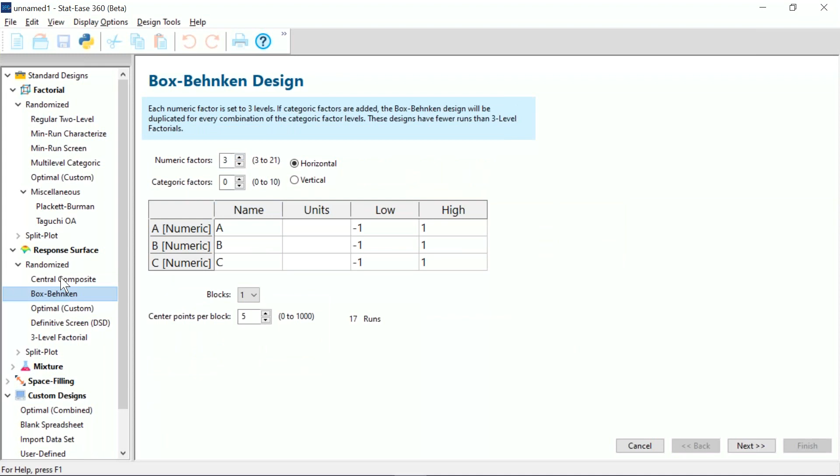Now, if you get the software, you can get it on trial, and you can learn about these 2-level designs by running these tutorials as a do-it-yourself, run all the way through that. And then if you're interested in response surface, there's a tutorial on that.

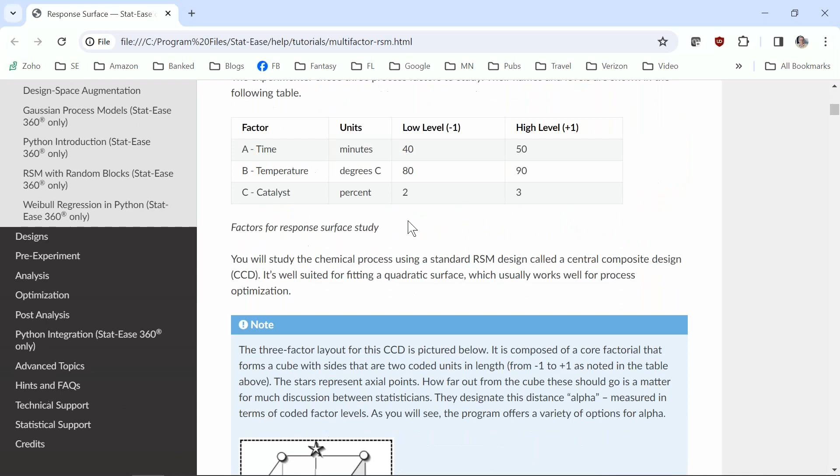And in that tutorial, it shows a picture of the central composite, which is the core of the 2-level factorial with the center points, and then with these axial points represented by stars sticking out of the sides to give you more levels and more leverage. Okay, so that's the basic strategy of experimentation.

And oftentimes we refer to this as SCO, which is what DuPont called it when they started promoting this back in the 1950s. They called it the SCO strategy. And then I added the R to make a nice acronym of SCOR with the ruggedness testing. And this final phase, which is really confirmation, you could run more advanced response surface methods even at this point to generate the quality by design space. But the quickest way of doing it would be the ruggedness test.

Okay, so now I'm going to go back to my control panel, and I'm just going to ask if you're with me so far. Raise that hand button. All right, Wolfgang, thank you for weighing in. Gabrielle, and so forth. Okay, great. So I'm going to put the hands back down.

Also, we know from looking at our design builder in Design Expert or Stat-Ease 360 that if we go to the 7 and 8, that's a red design, that's going to be very low resolution. And so we'll end up confusing main effects with multiple 2-factor interactions, which is not a very good idea. So let's say that we reject that immediately because of the poor resolution. It's also got low power and we're missing 2 factors.

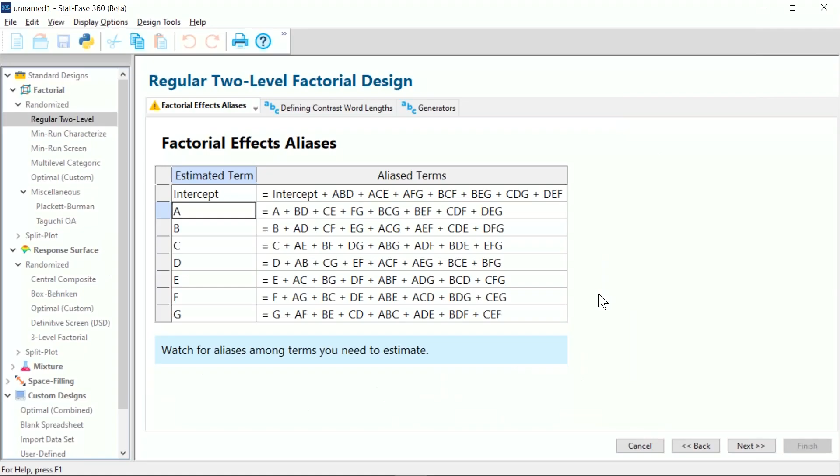So then we consider looking at all 9 factors in a classic 32-run design, classic or standard. So now let's say we go to the 9 factors, we're going to have to go to 32, but now that's too many runs and we're kind of overpowering things. So nope, let's reject that one.

So then we decide that we're going to choose a modern minimum run screening design. These are optimal designs, but they've been formatted and templated, so you're always going to get the same pattern. And then if we add in 2 extra runs, that'll be good. And so I'll show you where that is. That is under minimum run screen.

And the absolute minimum for 9 factors would actually be 9 times 2, which would be 18. But we warn that if you do that and you have 1 missing run, it's going to degrade back to the low resolution or red design.

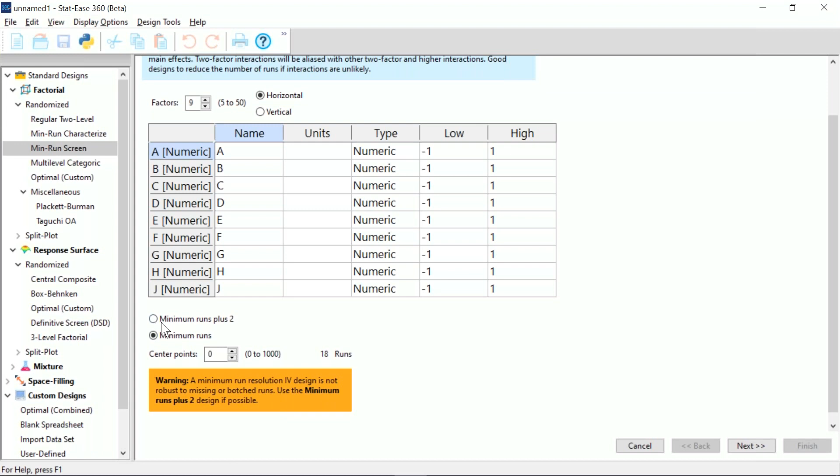So we rebuilt this, and I give credit to Pat Whitcomb, the founding principal of Stat-Ease, and my colleague going back to the 70s, and Professor Gary Oehlert at University of Minnesota as our advisor developed these, and they crunched through all of it twice after doing all the crunching, which took about a year back in the day with the slow computers, and getting the minimum run part of it. Pat woke up one morning after a sleepless night and said, hey, we've got to redo this all with 2 more, and this is what we recommend.

Now, we only have 20 runs here instead of 32. So if you're with me on this, that maybe this might be the way to go with the 20 runs, press that raise hand button. And I just want to see if you're buying into this idea of kind of, like Goldilocks, getting just the right size. Okay, I'm getting some positivity coming back, so I appreciate that.

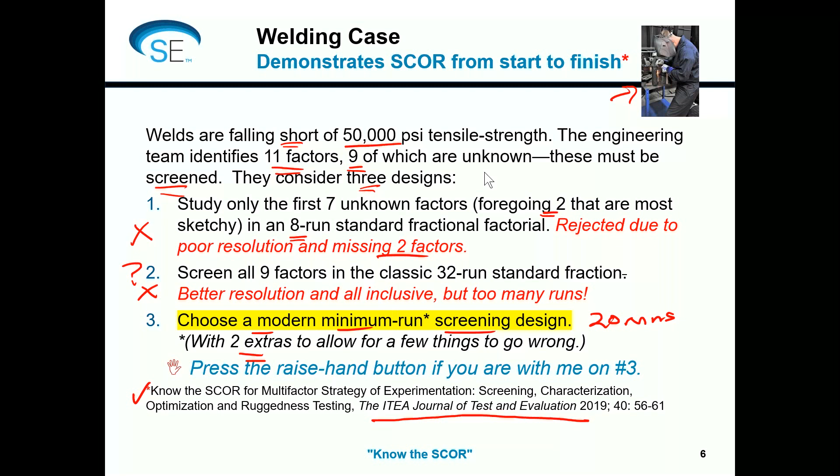And then I have a slide that just shows where we're at with 9 factors, cutting down to the absolute minimum, but then plus the 2 would equal 20. And that's what I would recommend. And you can see that this is going to be very advantageous to use these minimum run options for screening. And then we also have them for characterization as well.

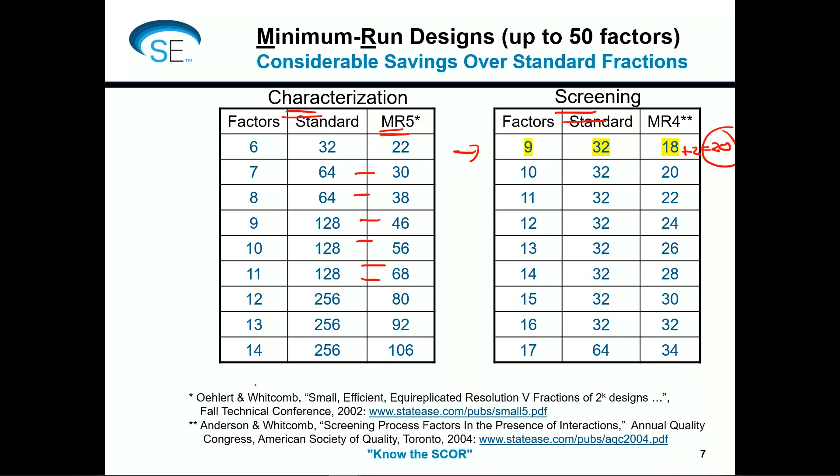And so you can see that with these characterization designs, we can achieve a minimum run with a resolution 5, which will detect 2-factor interactions, but we can reduce the number of runs substantially. So here you see Pat and Gary having published their paper, which is available on our website. And then I gave a presentation to the American Society for Quality back in the day, talking about these designs.

Okay, so now let's look at the welding case in detail, and let's look at these 9 factors. Now remember, there are some other factors that are being set aside at the moment, according to our strategy. And you can see that they've got a whole series of different things that can be changed from low to high to see if they have an impact. One of the factors is categoric.

And then another funny little thing here is that the letter I is missing. We skip right from H to J because I is being used for the intercept, or in the technical jargon of design of experiments, it's the identity column. But either way, we're skipping past I to avoid reusing the same letter for 2 different things.

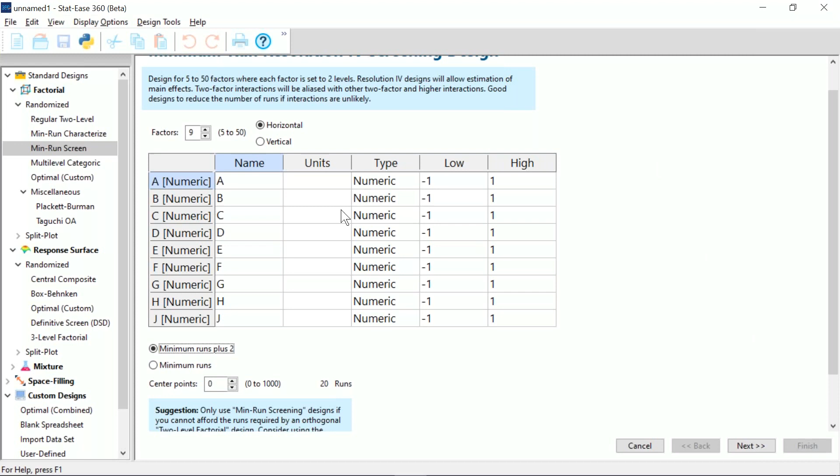Okay, now what I've got here is just some of the 20 runs shown here, and I've skipped by a bunch of them. But if you look at the tensile strength results here, you're going to see that we have some that are exceeding the goal of 50,000, and so that's going to be a promising outcome. Now I'm going to go ahead and go to the tool, which is Stat-Ease 360, but it includes all of Design-Expert. And I'm going to open up this screening design.

And then I'm going to do Control mouse wheel to reduce the size of this. It's going to be pretty small. But what we're going to see if we sort this is that there are some runs that are above 50,000. Let me Control mouse wheel this up again and then just scroll over to the right. And so we can see sorted out that there are some runs above 50,000. So that's good.

Okay. Now, just to show you how this is built, we're going to be going with minimum run screen, and just typing in the names, the units of measure, the type, and remember this last one is categoric, not numeric. So we have alphanumeric information typed in here, and then you can see that we're using the +2 option.

And it turns out with the aliasing of this that the main effects are aliased only with 3-factor interactions. Oh, I'm sorry, this is a screening design, so, like I said, the main effects are aliased with only 3-factor, which means that they're fairly clear because we could ignore the 3-factor interactions. But the 2-factor interactions are still aliased with other 2-factor interactions. So this is really only going to be good for looking at main effects. If any interactions come out, they're going to be kind of messed up.

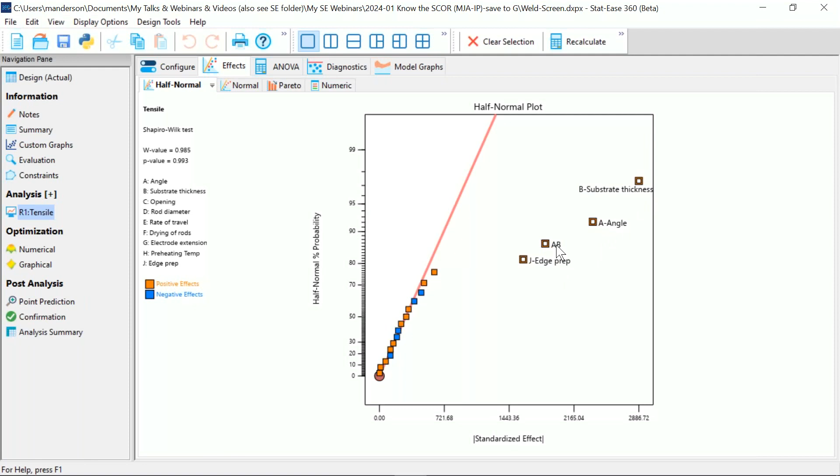and then there's an interaction, which we won't put a lot of faith in, but it could very well be that it is the angle and substrate that interacts. But this interaction could be any number of other things. As we see in this numeric table, you can see all the other 2-factor interactions that are going to be partially aliased. So we're a little bit careful about putting much faith in whether it's really AB, but it very possibly could be, because we've got the parents of A and B in the model.

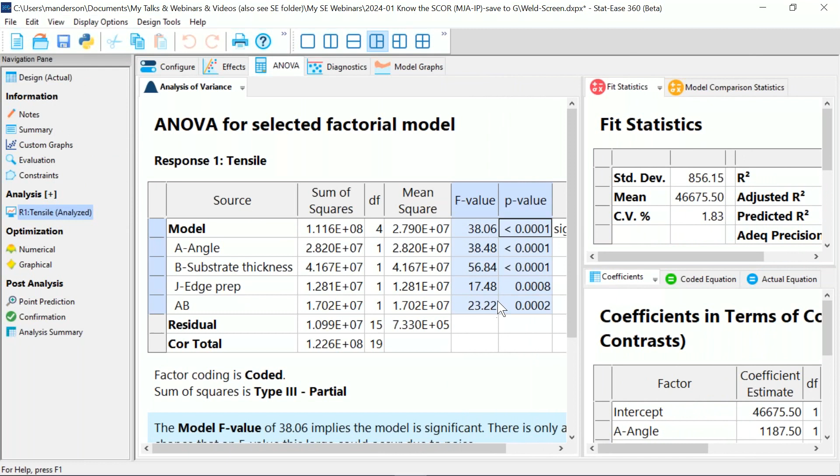All right, and then a Pareto chart is always compelling to show with an ordered bar set that these are standing out from the trivial many that are down below this black line. And the effects that I've picked are even above the more conservative Bonferroni limit at P of 0.05. And we see these good P values in our analysis of variance right here. And I can do control mouse wheel and make that a little bit smaller so that we can see both windows at the same time.

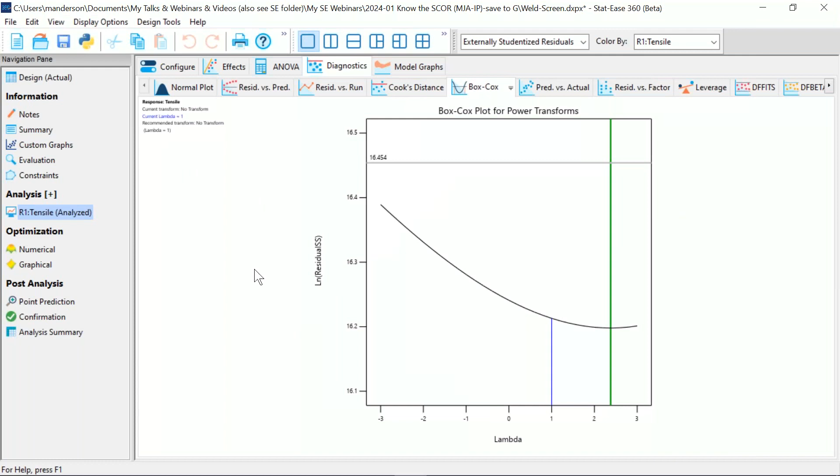Because I also like to look at these adjusted and predicted R-squared, adequate precision; they're all good. I always check diagnostics. The main diagnostics that I like are the normal plot of residuals that are falling in line, a la the pencil test, as we call it, or fat pencil test. I like to look at the residual versus run to make sure there's nothing outside of the red lines, no trends or anything like that. And then the Box-Cox plot is also a very important plot, just to see if it recommends a transformation, which it doesn't.

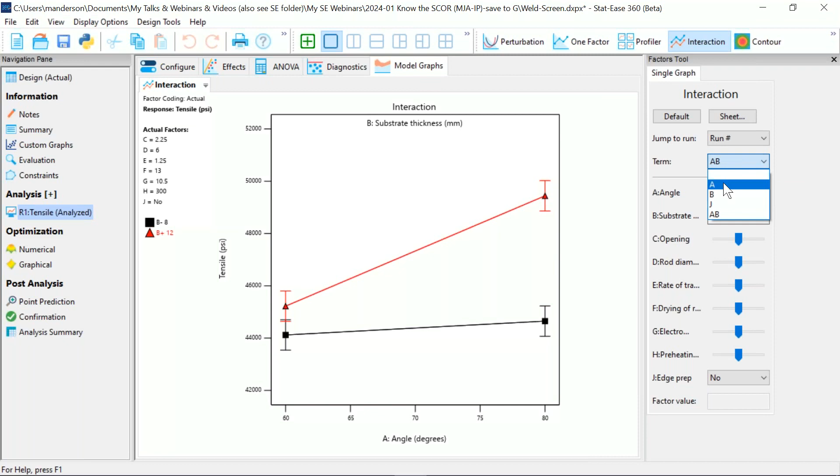So then in the end, we could think about what's going on here. We're not going to pay much attention to this AB interaction, but it could be real. But let's just say that it seems like we have found that there's a couple more things that we should consider. Normally I wouldn't show this graph with the angle being part of an interaction potentially, but let's just say that the angle is coming out of the screen as a vital effect, and the effect of substrate. We have to consider that and do some more work on that when we do the characterization.

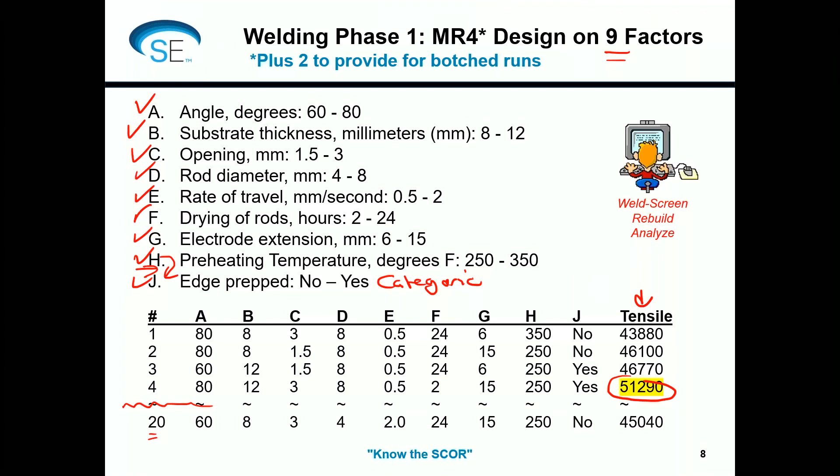And then the edge prep, which seems kind of a no-brainer. The welders were pretty sure that they really do need to spend the time to do the edge prep. But they thought, why don't we try this without it and see what happens? And that did not really work. So it was a good learning experience, and they were able to find that there were 3 more factors. So there were 3 of them that did come out of the screening, which were the angle, the substrate thickness, and the edge prep. And we had previously held off 2. So now we have 2 plus 3, we have 5 that are going to come into the next step.

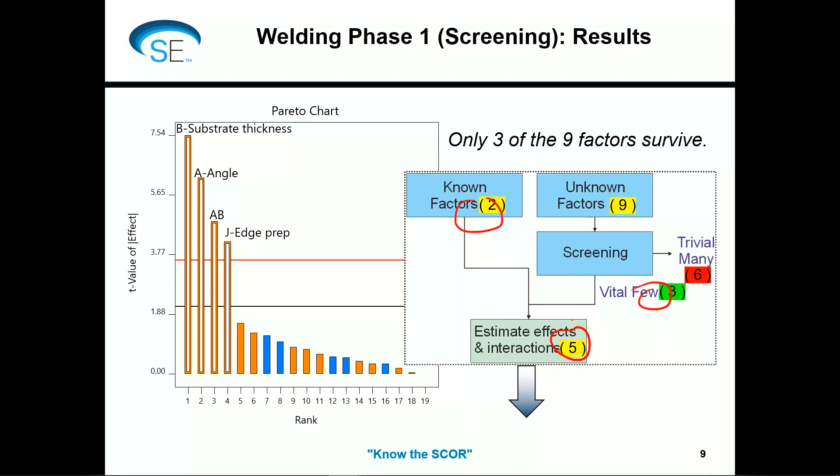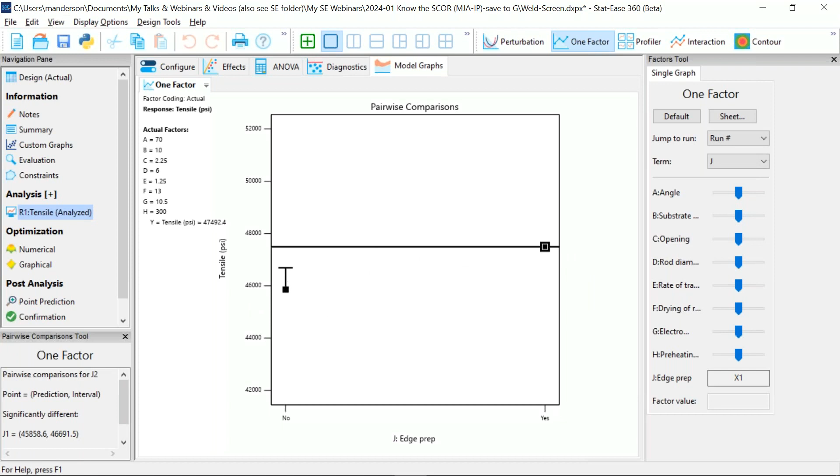So the edge prep, that was one that they decided they would just go ahead and say yes on that. All right, and just make that decision rather than trying to carry that forward, because it just was such an obvious thing. And what you can do is you can click on the higher level of this, which is the yes for the edge prep, and you can see that the LSD, least significant difference bar, doesn't meet it. There's a gap. So that's telling us that is indeed a significant effect, and we also can get that from the p-value.

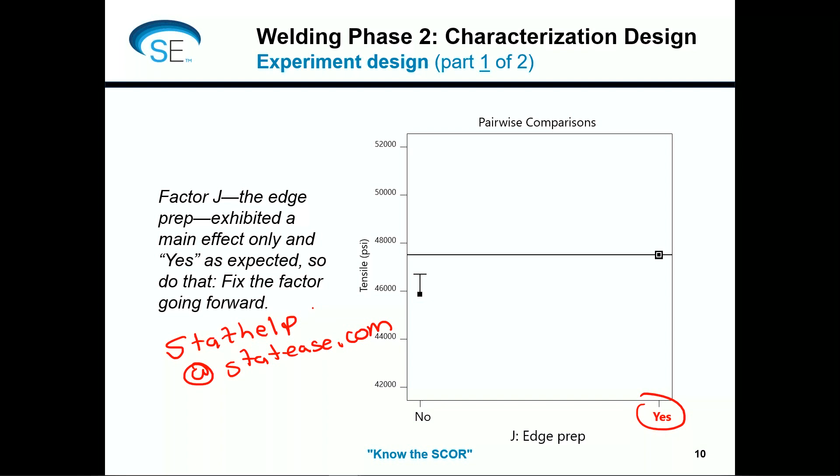Okay, so moving ahead then with our welding, we're going to move to phase 2. And since we've set the edge prep, then all we're left with are the 2 known factors that bypass the screening, which are the current, which is a change in the amps, and whether we use stainless steel 35 or stainless steel 41. Now we have 2 more factors being thrown in for this next phase, which is characterization. And remember, this is going to be either a high resolution green design or a full 2-level factorial.

All right, so considering if we have 4, then the full factorial would be 2 to the 4th, which would be 16 runs. If we try to do a fractional design on 4 factors, let's just set up a new design here and look at what would happen. So if we have 4 factors and we try to do a half fraction, that's going to become a yellow, which is the screening design, and that'll still have the problems of aliasing of 2-factor interactions. At this stage, we can't handle that. We need to have something that will resolve the 2-factor interactions. That's why we're doing the characterization.

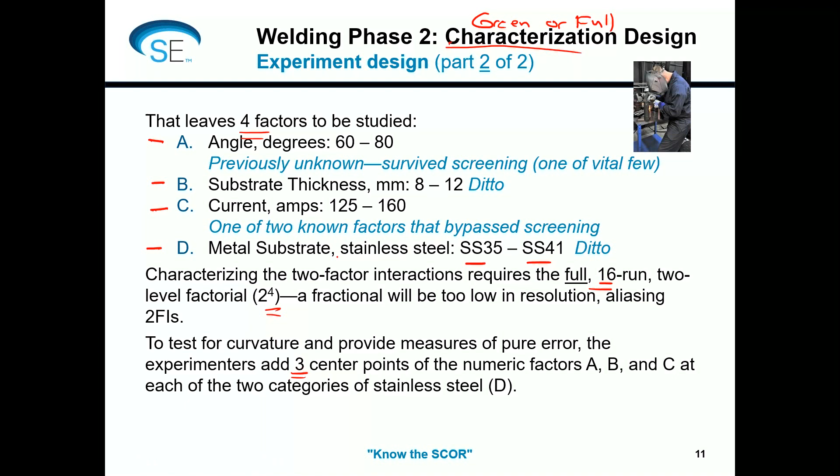In this case, they added 3 center points. I like doing 4 center points. I think it's just a little bit better. I would recommend 4, but 3 is okay. So they did 3, so that's what we have to deal with. And so let's see what happens next. Okay, so as expected, all 4 factors emerge as main effects or were involved in the 2-factor interactions. And so we're going to move on to the response surface methods.

And it says that there's no time to demo this, but maybe there is time. Since I've presented this a few times, maybe I should demo that. So I'm going to demo it. Let me just ask the group, though, if you're okay with me showing this design, just so you can see what happens with the 2-level design with center points. If you're interested in seeing that, press that raise hand button. Okay, yeah, I'm getting some affirmatives on that. So let's just see what happens. I have it actually teed up here already.

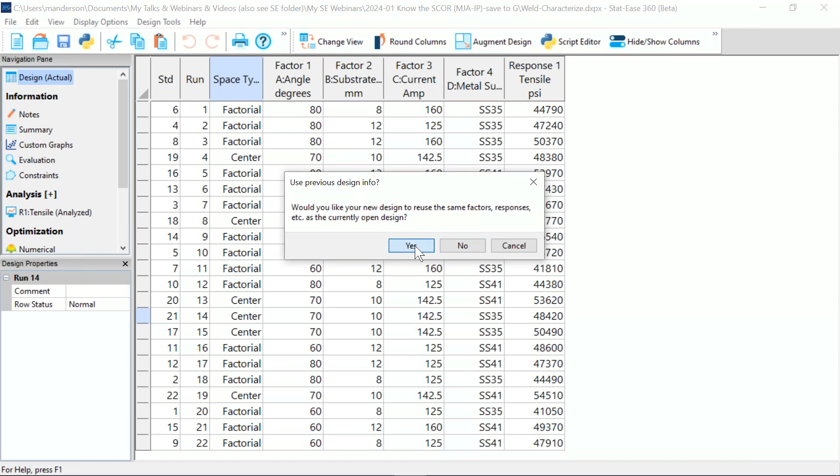And you've seen how you set up a two-level design with center points. This happens to have 3 center points. You can see the 3 center points here. Now, what happened was we thought we were going to do just 3 center points, but because we have a categoric factor, there's going to be 3 at each level of the categoric. So actually 3 is not a bad idea, because you're going to get 2 degrees of freedom from the 3 that are done with the first stainless steel, and 2 degrees of freedom from the second one, for a total of 4 degrees of freedom for the curvature test. So because of this categoric factor, the 3 is not a bad idea.

And you would see this, if I would have picked 4, it would have been multiplied out, because we see this warning here. So that's good that I showed that. And we say yes to continue. And then we do a power calculation on it.

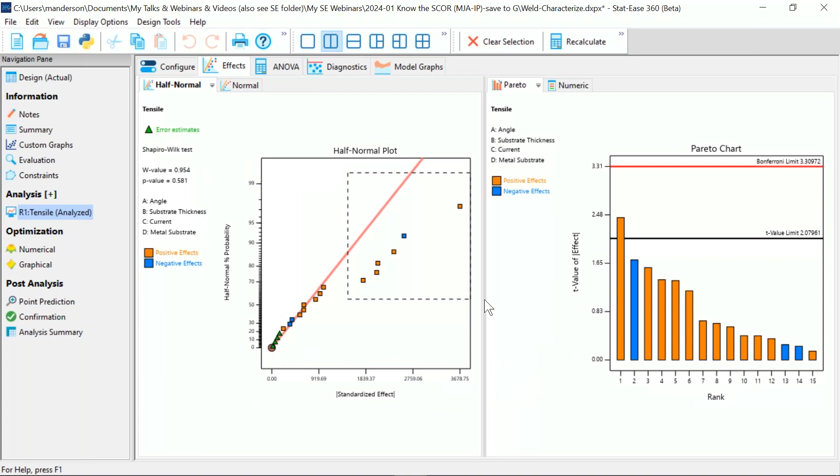So now I'll go ahead and open the data. And of course, I won't be able to spend a lot of time on this, but we're going to use this half normal plot. And by the way, this design, they chose a full factorial with center points, but because of the way it's structured, it's not orthogonal, but it's nearly orthogonal. And I'm just going to drag over these ones off to the right rather than picking them up one at a time. And you can see that there's definitely some standing off to the right here, including some interactions.

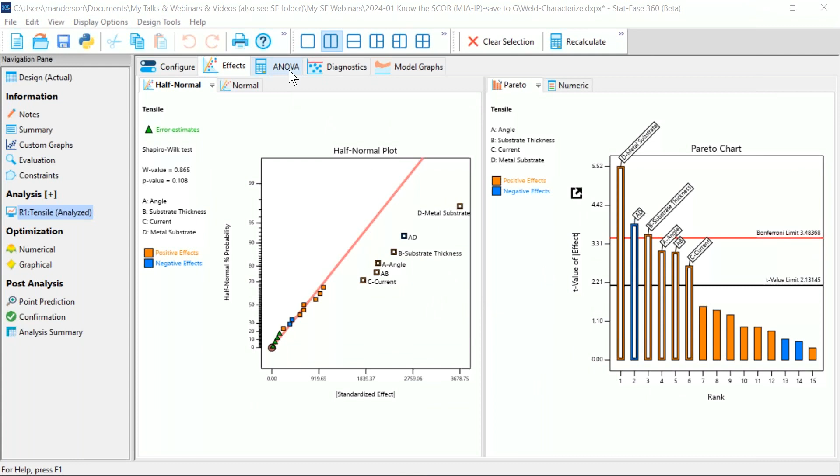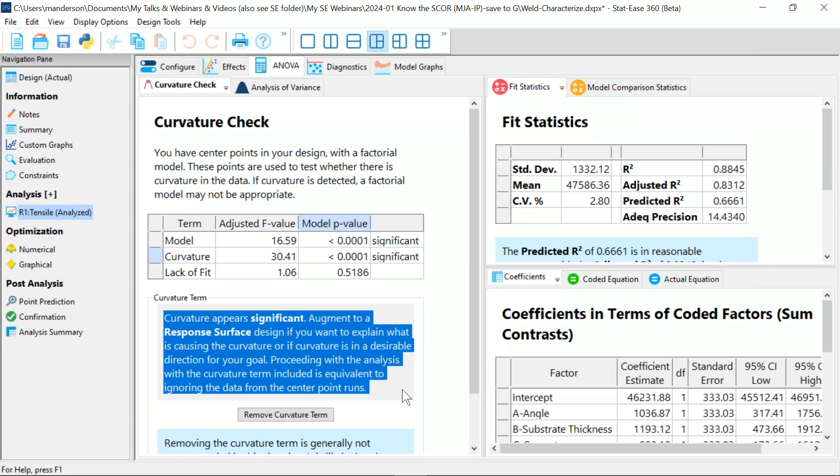And so we see that we've got a fairly complex situation here. And one thing we want to make sure, though, is that there's no significant curvature. But there is significant curvature. Whoops. Okay, so that's kind of invalidating things at this point, really, to use a two-factor interaction model. And so we're going to want to augment this to a response surface method and not spend much time working on it.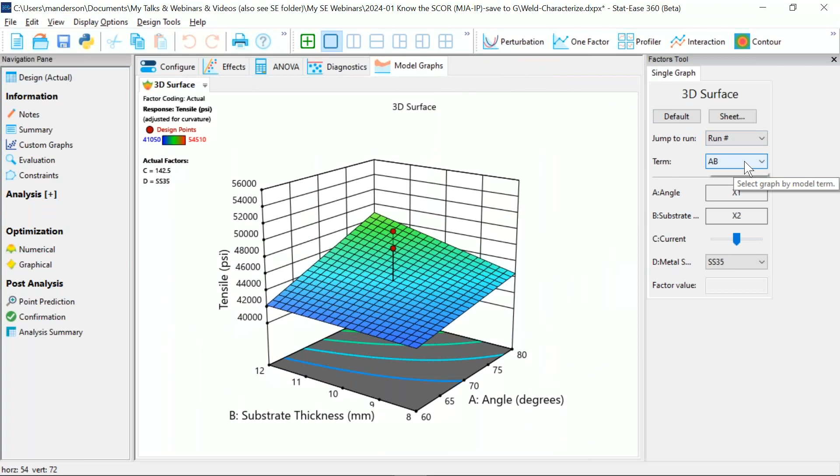Here it is. Okay, you can see that this green line, which is stainless steel 41, is definitely over the top. And at the center, these green points, which are the SS41, are higher than the red points, which are the lower grade stainless steel. So that's a decision being made by the subject matter experts, only carrying SS41 forward at this point.

Okay, so one of the nice things about knowing SCOR, the strategy of experimentation, of screening, characterization, optimization, and then ruggedness testing, is that you have options along the way. You're not doing one giant experiment. And one of the general rules of thumb is to put no more than 25% of your overall experimental budget into any one experiment or group of runs. And that leaves you flexibility to do 3 or 4 different experiments, which are actually a collection of runs that are done via DOE principles. And this is illustrative of that.

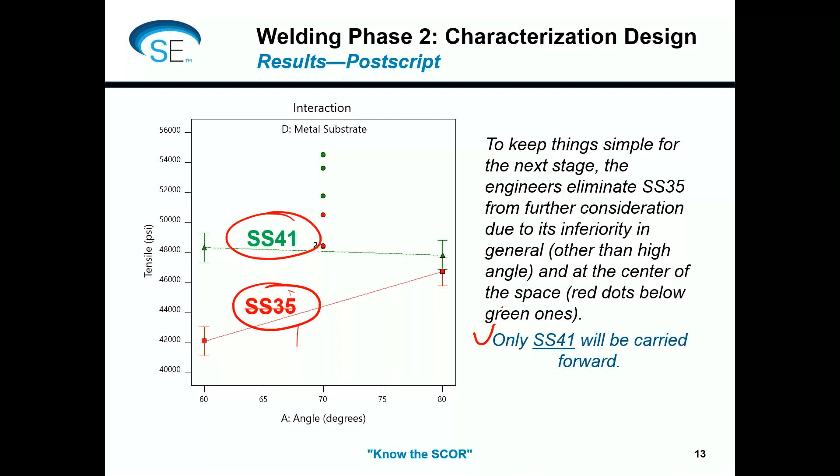It's a big payoff, because each time you finish one of your experiments, you can make some changes. You don't have to keep going with the same factors. You can change the levels. You can maybe throw in some new factors. And so it's very flexible.

So at this point, we're going to go to the response surface method because we are seeing curvature, and it's important. Okay, if it was just a slight amount of curvature, even if it was significant, it wouldn't bother me. But what's really the focus is: is it important? Is it something that we need to know about? And the answer is yes. So at this point we're applying the response surface methods, but rather than running across the entire mountain range that we could operate within, we're going to focus on one peak here.

And by achieving this focus, we can fit with just a simple polynomial model, and it just needs to be a quadratic that has the squared terms embedded in it. So the model that we're going to use will predict the response y as a function of the main effects, let's say for two factors, the interaction, which we can get from a two-level factorial, but we're also going to approximate the squared terms, and this is going to require a response surface method that has at least 3 levels.

And this technique was developed by George Box, as I think most of you know, and you probably have heard his saying, somewhat paraphrased, all models are wrong, but some are useful. So it's an empirical approach.

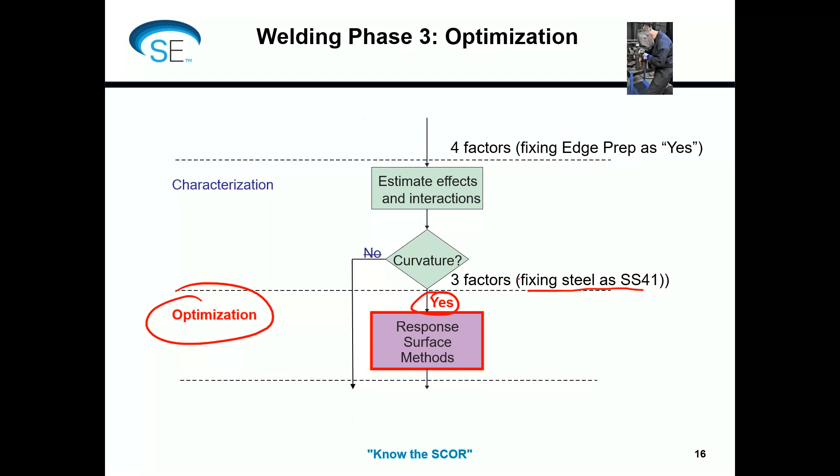So now we're at this phase of optimization. We have seen that there is significant curvature, and it is important. We actually had 4 factors, but we're fixing the steel at the higher grade of SS41, so that leaves us with 3, which is going to be a much more doable experiment.

So now we do this central composite I showed you in the tutorial from the software. The shape of this is a cube with the center point, and the center point actually will be done a number of times. I usually draw circles around it to indicate that, because we do want to achieve a focus at the bullseye here. And then we're going to push out from the original range with these axial points.

And a lot of people will take these axial points and move them into the face and create a face-centered central composite. However, that loses some of the properties we like for rotatability, in particular, having equally precise predictions equally distant from the center. So if you're going to move those star points in, there's actually another option that's called the practical alpha that I would recommend. But if you can run the original structure of the central composite with those star points outside of the original cube, that would be better.

Okay, so just to make sure that you're with me at this point and that you buy into the sequential strategy, give me some positivity with that raise hand button.

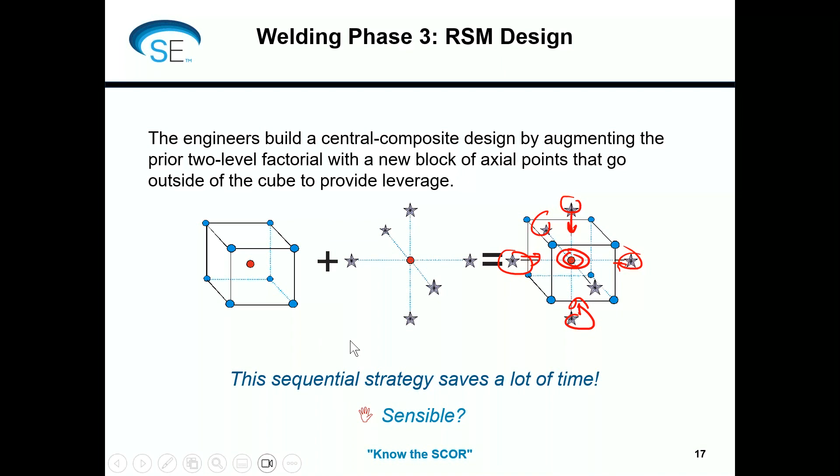And there's a method to my madness here, because thanks, Peter and Yun and so forth. I'm just sitting here at my winter home in Florida and presenting to a screen. So I need to get that feedback to make sure that my communications are working. Okay, thanks again for being active in participation.

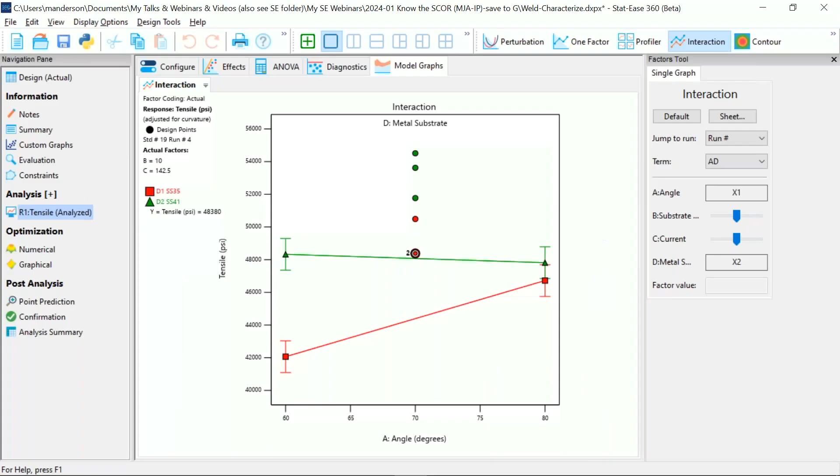So now we're going to do this additional block of runs, which are going to be added in using the tools of Design Expert. And we're going to create some additional center points. And this is being laid out, right now, I think, in standard order. So the order of this is going to be randomized. But what we see is that we're getting a lot of green numbers here that are above our 50,000 goal that we had. So we're really starting to make progress here at this point in knowing what the critical vital few factors are and where to set them.

So I'll go ahead then and open that file up, which is the optimized file. And here it is here. And you can see the space types are listed. And then the actual order of this was randomized in the second block. You can see that, which is really important. But when we sort this, we're going to see that we get in the second block some really good results that are over 50,000. You can see them here.

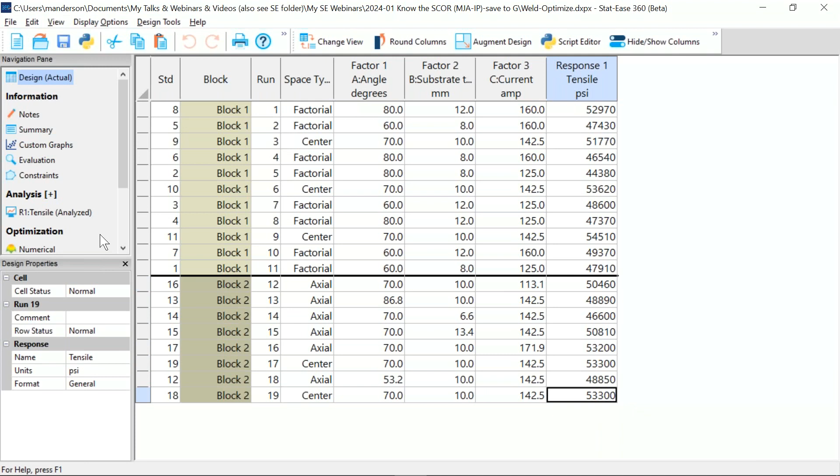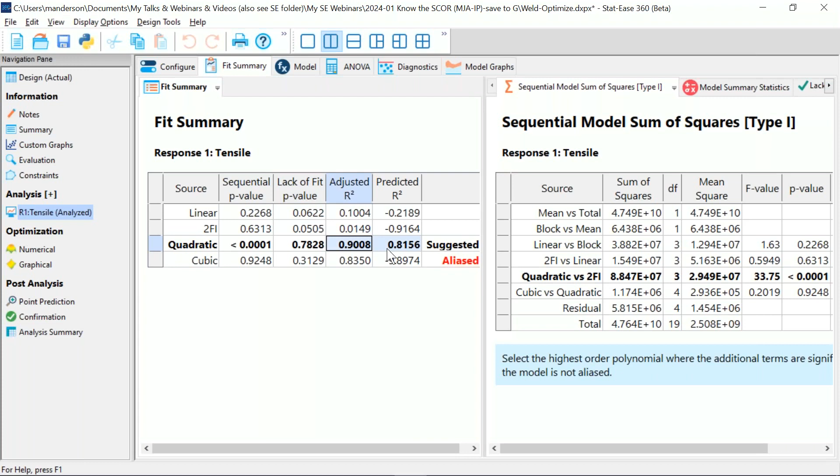Okay, so let's take a look at the analysis of this. And it turns out that it's advantageous to fit the quadratic to this data, which is what we designed the experiment to fit. That's what the central composite does. Or you could do an optimal design to fit a quadratic, and that would work. And we see that the quadratic terms themselves are very significant. By adding those quadratic terms, we eliminate significant lack of fit that we were getting with the two-factor interaction model. We saw that before. And we get really outstanding adjusted and predicted R-squared values. So the quadratic is definitely the way to go.

What we could consider would be a model reduction. It wouldn't be very effective though, because we need to keep the substrate angle in the model to support the A-squared term and create model hierarchy. So we wouldn't want to get rid of angle. Possibly we could get rid of this BC. We do have an auto select option, and if we set alpha out at 0.1, that does take the BC out.

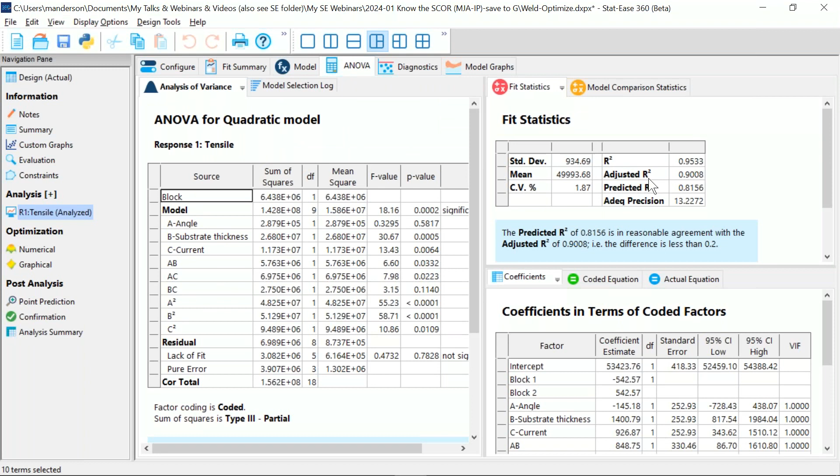But to me, at this point, I feel like we're kind of splitting hairs. So I would leave the BC in if it was me, and just go with the full quadratic model. But this is where George Box said all models are wrong, some are useful. So if you decided to get rid of BC, you wouldn't be wrong to do that.

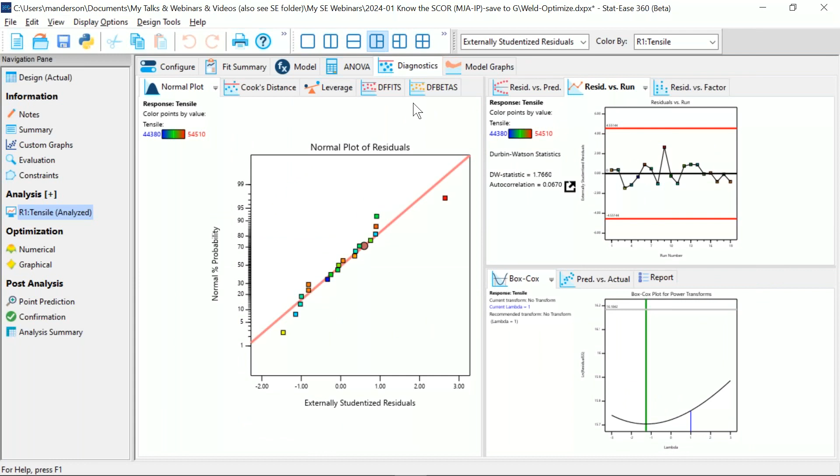I don't think it would have much of an impact either way. And we look at the diagnostics. One of the things you could do is try different models and see if it changes the final outcome, and I'm certain that it wouldn't in this case. So now we get a really good picture of what's going on with these factors. All of them are having impact, and they're all having curvilinear impact. I can see that from this perturbation plot. I don't know if you can really choose between these three factors in terms of how they're affecting things.

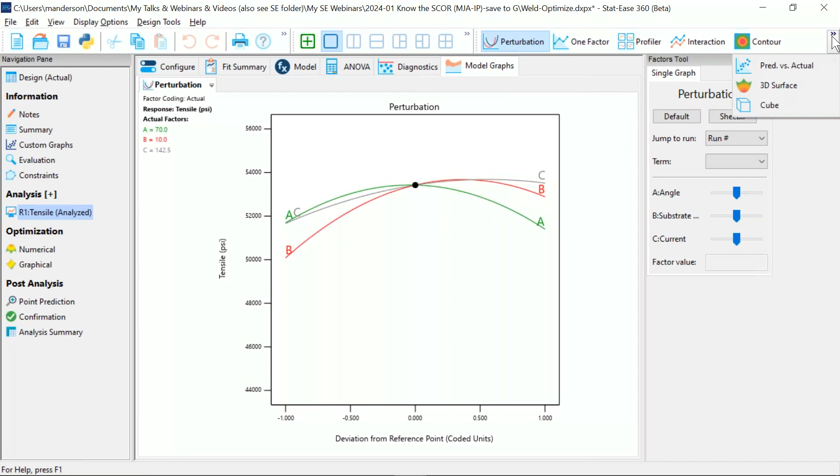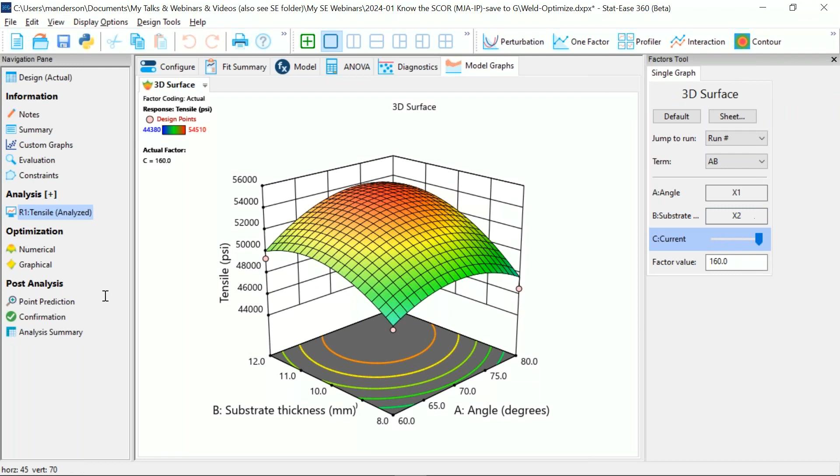So now we're going to go to the 3D surface, and then we can slice this current. We can move this up or down and see what it does to the surface. But we want to increase that tensile strength, so I think going off to the right is going to be the way to go here. And then we could use the software to find a maximum outcome. And we said we wanted to get to at least 50,000, so I think I would type that in as a lower threshold. And then I would just put a stretch target at the top here and see how far we can go.

And the only other thing I would do, which we're going to talk about next, is I would do a confirmation run, and a ruggedness test would be the best. But at the very least, I would do a series of confirmation runs, and I recommend doing 6. I wouldn't do just 1 for obvious reasons. 3 is a popular number, but I think that's a little bit weak. I wouldn't do 100 confirmation runs, but I think 6 is just about right. And then we could set these parameters, let's say for the angle and for the substrate thickness, to some convenient level.

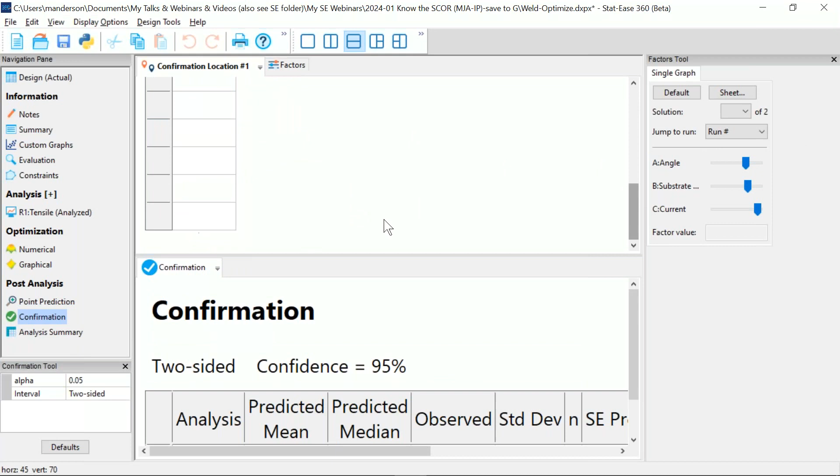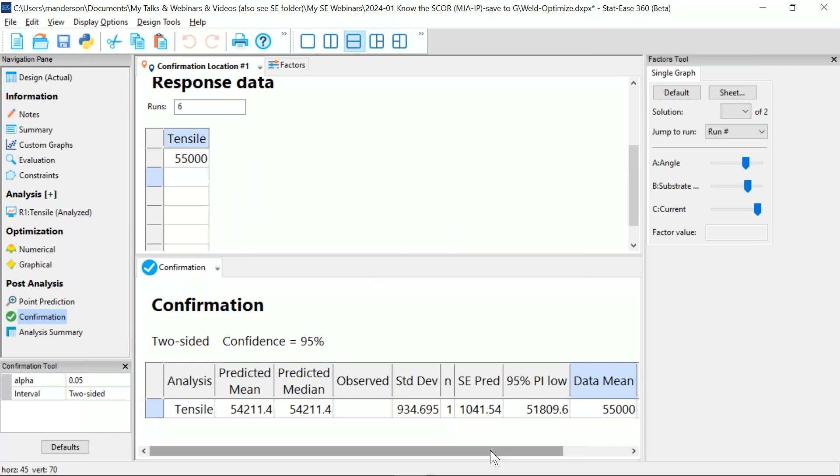And then we would collect the data here. Whoop, I did the control mouse wheel and I got a little bit carried away. So what we're going to do then is put the numbers in here for the tensile that we get, and hopefully the numbers would be good, and they're going to flow down into this field here for the data mean. And as long as we're between the prediction interval, which will adjust as we add more data here, we're good. But if something just went completely haywire and we got only 30,000, something has gone bad, probably a special cause, and now we're not within the range, and so we would have to say this doesn't confirm. But in this case, it did confirm.

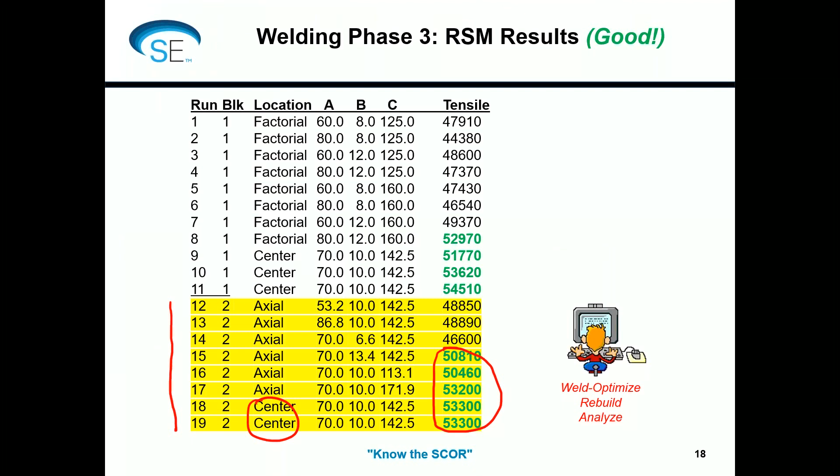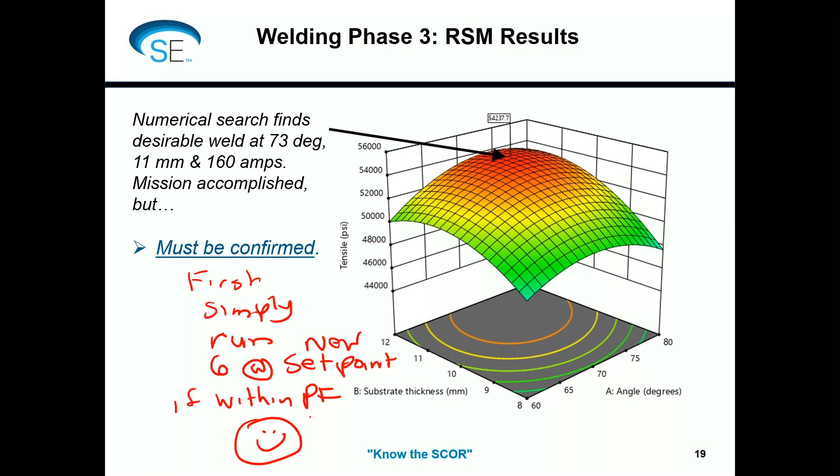Okay, so that is an extra little thing that I don't have a slide on, but I highly recommend it. So we must confirm this, and I would start by first simply running 6 at the new set point. Okay, and if that's within the prediction interval, then you're good. But a more active confirmation would be to do a ruggedness test.

And the reason I'm saying that is because we could make this work at the lab for the welding, okay? But what's going to happen when we go out to the field? Let's say the U.S. Navy is going to start welding with these new conditions. Is it going to work there? Because now we're out on the West Coast at some manufacturing operation. It's got very high temperature, low humidity, or maybe we're out on the East Coast and the humidity is high, things like that. And what about the actual welders? Well, they should be very well trained, but they may not be as well trained as we are at the research center, and so that could have an impact. So we have to consider what are the factors that might be applied once it gets out to the field.

And so what I recommend for this is we shift over from the standard 2 level to this Plackett-Burman design, and doing a little bit of studying brought up some interesting stories about Plackett and Burman being guarded by the military in the UK at a Scottish castle because they had these test plans that they could produce for development of ordnance. And so it was highly classified and they were very important people.

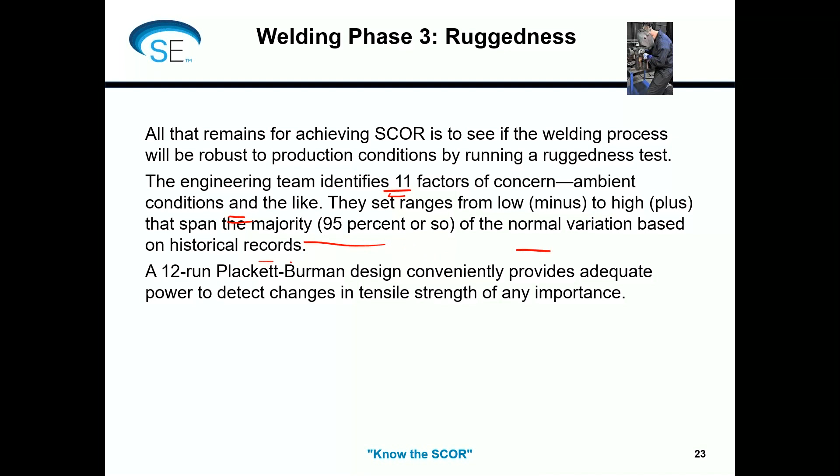Okay, now we have some different things that could happen here. One thing would be that we could get nothing significant, that would be a flat line on this normal plot, but the absolute magnitude of the effect could be quite large. And so let's say that in this case, well, we're talking about tens of thousands of tensile strength. 217 is not very big. So in the left-hand case, we've got something that is insignificant and unimportant.

So I would say that's pretty good. Do you agree with that? Press that raise hand button if that was an outcome. Okay, I'm getting agreement on that.

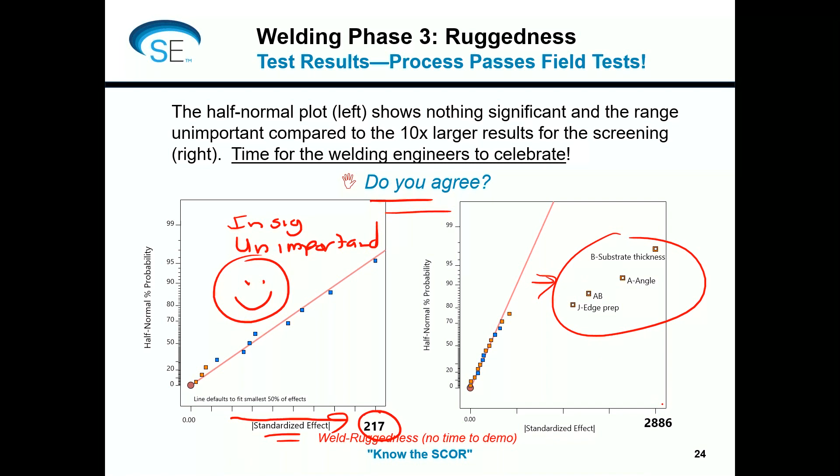Okay, now another scenario is that we could see things turning out significant because they're off the line here, and it could be quite large. So this one is significant and it's important. So obviously this would not be very good. So what did the engineers see in this case? They saw this. So that was good. They didn't have to go back and do further work and resolve it.

So that completes my presentation for today. We're up to the full hour almost with just a couple minutes left. So what I say is it's good to know the SCOR, that you understand there's a strategy of experimentation that's tried and true going back to the 1950s and continuing on from there with DuPont's SCO strategy.

And so all I've done is added on at the end the R, because I do think this ruggedness testing is really the most conservative approach rather than just simply repeating the same set point over and over under the ideal conditions at the R&D center, to actually go out to the field, understand what they're going to be facing out there, and then see if your test method, your process, or your product is going to continue to operate the way you expect. And I've seen the answer being no quite often.

For example, with test method development, we had some pretty major failures of test methods transferring from Minneapolis to our plant in Kankakee, south of Chicago. For the reasons I mentioned earlier, they were recycling reagent, they were using a different level of operator, they didn't follow the method procedures, they did all kinds of things. And so that should be done before we finalize the technical transfer. We should be running that ruggedness test.

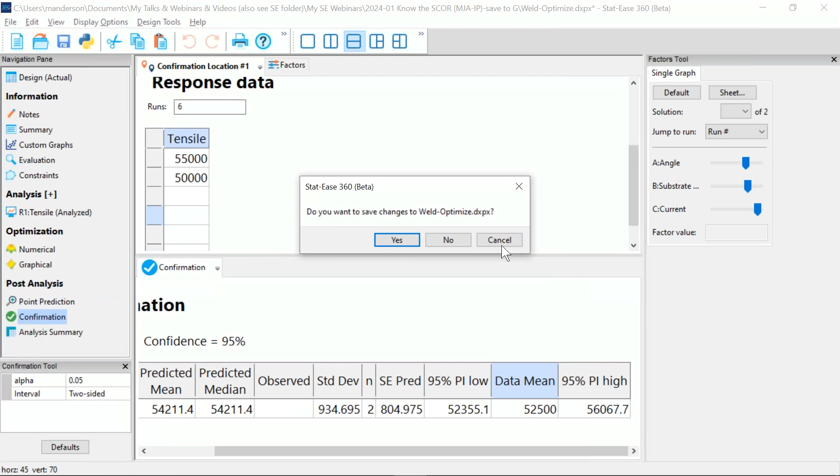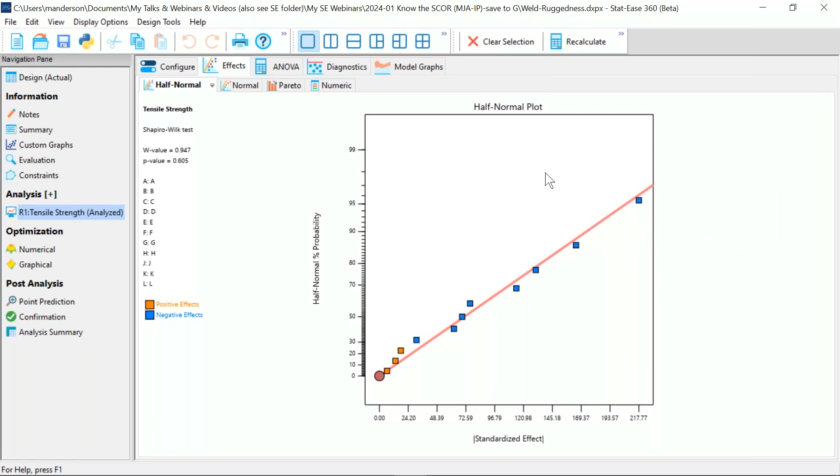So, for example, if I pull this ruggedness test up for the welding, and it turned out that 217, you can see it here at the bottom, and it's got a straight line. So that was good. Okay, but let's say it wasn't good. Well, then you would simply go to Design Tools, Augment Design, and already it's set up with a fold over. You just say okay, and we're going to fold over on all the columns, and we could do a design

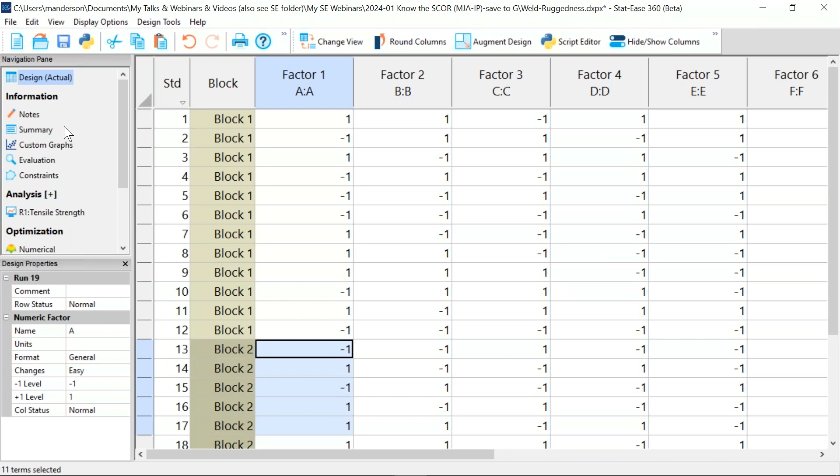evaluation, but you can see now we've got a second block of runs, and in the second block of runs, it's opposite. So where it was plus, it goes minus, where it was minus, it goes plus, and you can see these columns have gone completely opposite. And so it's another 12 new runs in this case. So the resolution of this now ends up being resolution 4. And so we're able to detect the main effects aliased only with 3-factor interactions. And so no aliases are found for the main effects model.

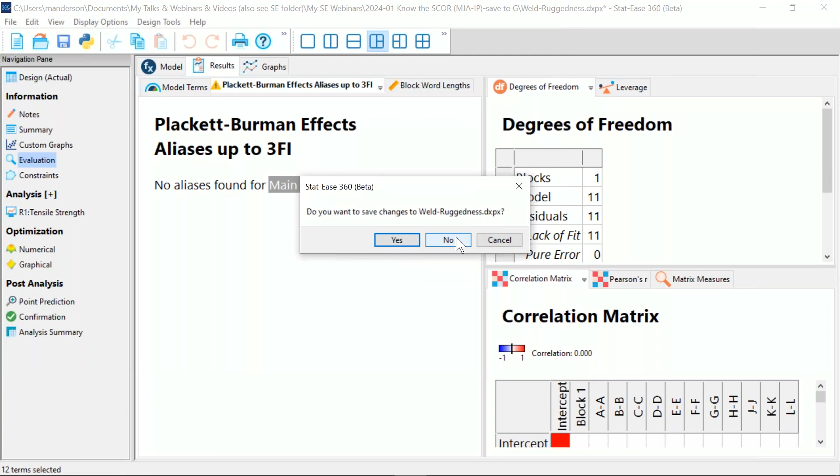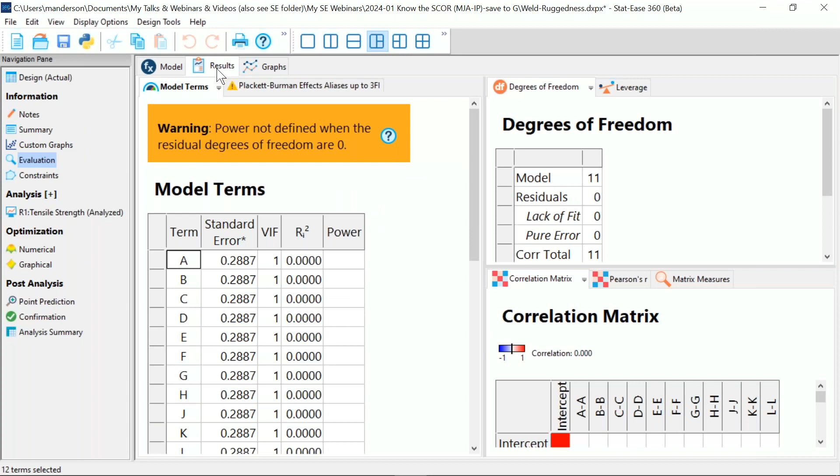And of course, our original design for the ruggedness was resolution 3, so that all the main effects were aliased with 2-factor interactions. And so in that case, we didn't have the resolution we needed. I've got to put in the 3-factor order. The main effects were fine, but the 2-factor interactions weren't.

So to wrap this up, I suggest as a reference that you take a look at the Simplified series that I'm the main co-author of, with all the mathematical backup from Pat as my co-author for the first 2 books, which cover the process side of things. And then Martin, our current CTO and president, and PhD statistician, has worked into Formulation Simplified. And that would be the thing to look at if you're interested in doing mixture design for optimal formulation. But what I've covered in this presentation is covered in these first books, DOE and RSM Simplified.

And Doug Montgomery suggests that it's really important to spend a fair amount of time before you start the first design experiment to plan what's going to happen, to make sure that you've got a decent set of factors and the ranges are reasonable. So I really advise doing range finding at the start.

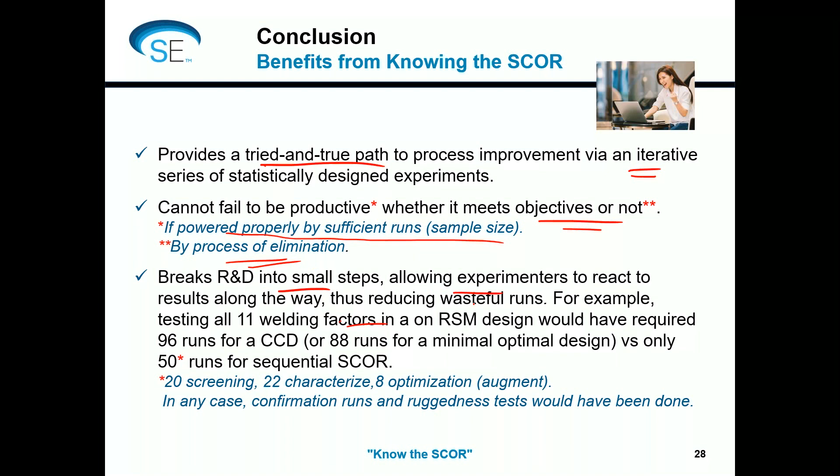runs. If we would have started with 11 factors from the beginning and done a complete RSM design, that would have required 96 runs, whereas we only used 50: 20 for the screening, 22 for the characterizing, and 8 for the optimization, by adapting as we went along the way. So it was about half the number of runs, and it got us a much better outcome with a lot more information.

So the WIFM by example to lay out a strategy, hopefully you could see the advantage yourself on that, and mapping out a sure path, hopefully you can see the advantage of what's in it for you on that, and that this is something that was helpful to you.

So I'll just finish up by asking, do you agree that this was a useful presentation? Yes, I hope so. Not that I want to bias the results, but go ahead and throw those hands up. And thank you, Wolfgang, clear and comprehensible presentation. I appreciate that comment. And that's all I've got time for.